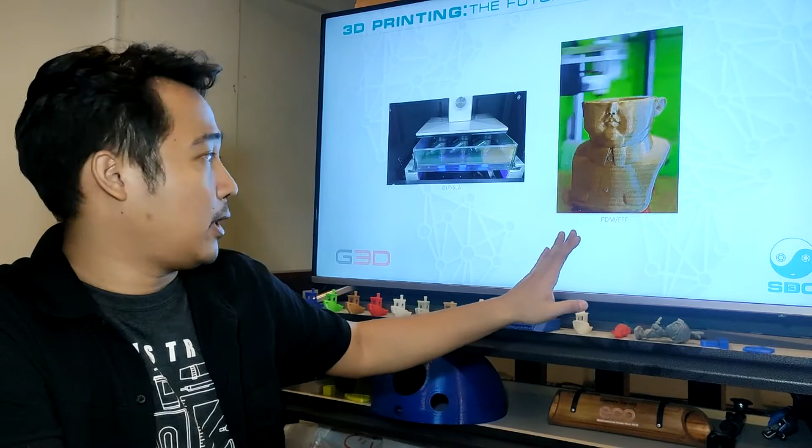There are two common 3D printers now in the market that are affordable and easy to use. The other one, on your right side, is the fused deposition modeling, or what they call fused filament fabrication, and the DLP, or digital light processing, and SLA using UV light to cure the plastic.

3D printing is a process in which material is joined or solidified under computer control to create a three-dimensional object using a CAD file, or computer-aided design, from a 3D model or a computer. So it is being used both as a rapid prototyping technology and additive manufacturing.

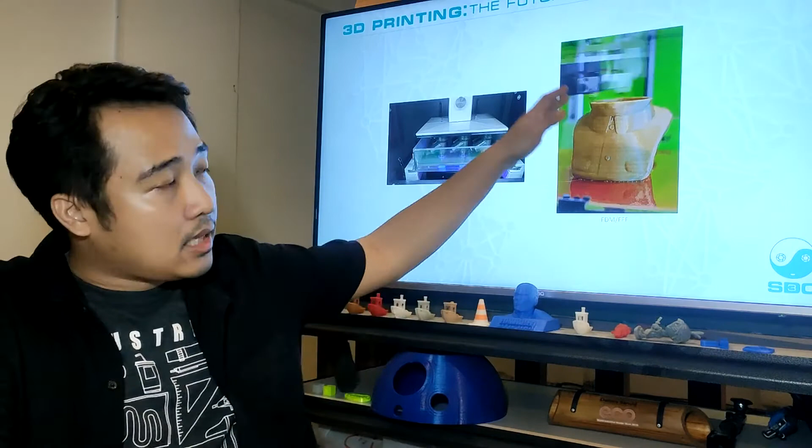Let's discuss the pros and cons of this technology. On FDM, this one can be printed at affordable cost and can be ready to use after printing. While on the DLP and SLA, it can print faster and more detailed than the FFF 3D printer.

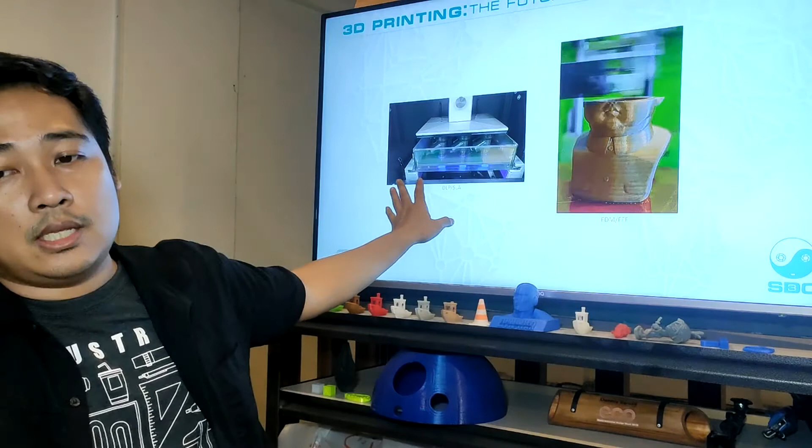So what are the disadvantages of using both technologies? On FDM, the printing is slower and the lines are visible. While on the DLP side, the con is it must be cleaned first before being cured, UV cured, or cured in sunlight.

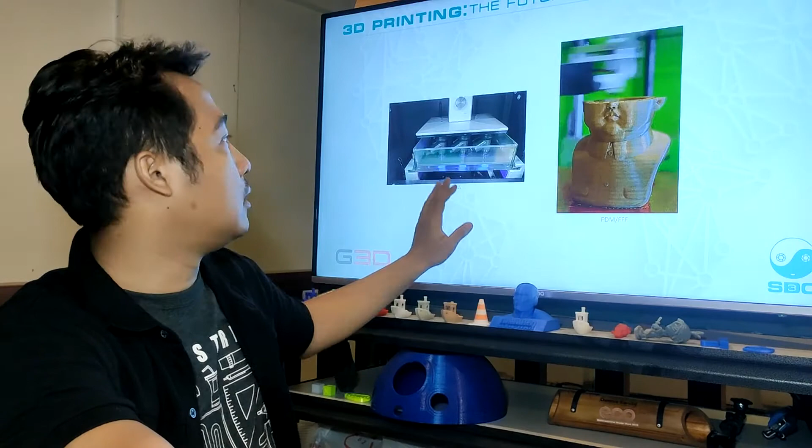As you can see here, this is the tilting mechanism of this 3D printer. I'll discuss this printer later.

3D printing made a big role in our battle against COVID-19. 3D printing technology was utilized to make things for critical healthcare and frontliners due to shortage of PPE, ventilators, respirator parts, adapters, and other material supply.

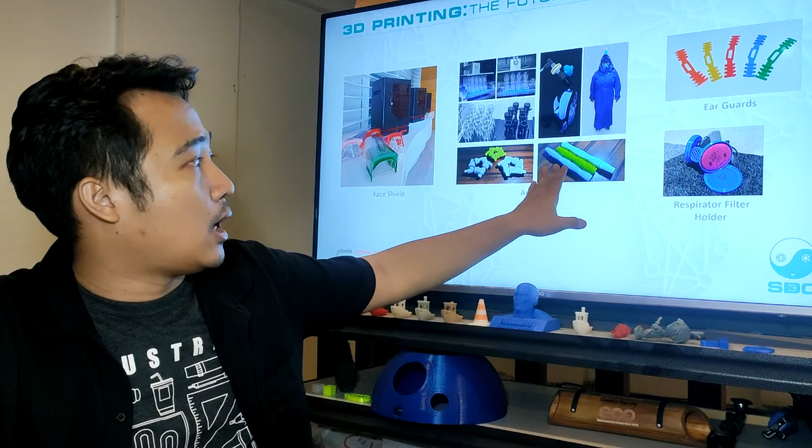As you can see in the picture, it was famous for making face shields and adapters. These adapters are Venturi valves. And then this one is what I've designed for our medical frontliners, for them to use as a modified respirator like this one.

On the other side are the ear guards, the famous ear guards, which you can put on your back, and then hold the mask or the N95 mask for you so that your ears will not get sore.

On this next slide, these printed objects are done with the help of Benilde ncoVolunteers and SDC 3D and G3D.

On this side, this is the adapter, or airflow adapter, for this mask or modified respirator mask, or what we call MORE mask. This one is our delivery in Rosario, Cavite. This picture is in G3D, or Global 3D Systems, which is made in the Philippines.

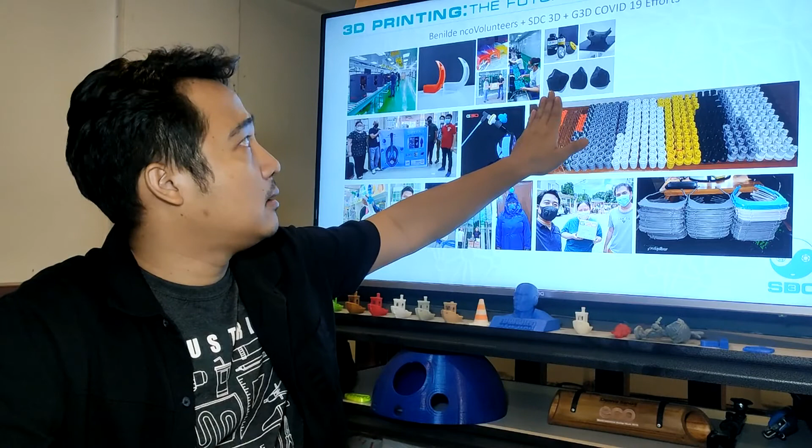On the other side of the picture is the laryngoscopy, which used medical grade resin. And this one is the respirator mask designed by G3D using their 3D printer, the T1000, and their resin.

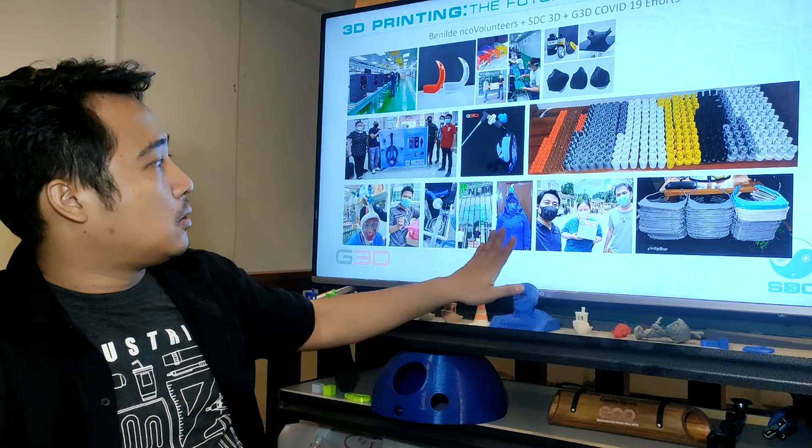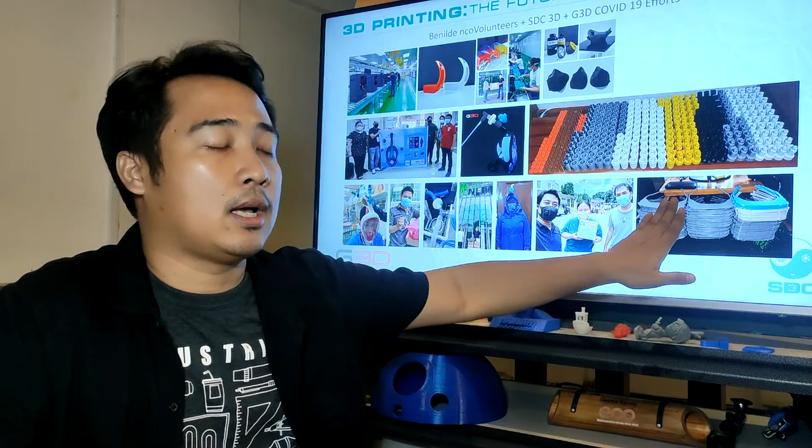And also I printed this face shield last April to help our frontliners.

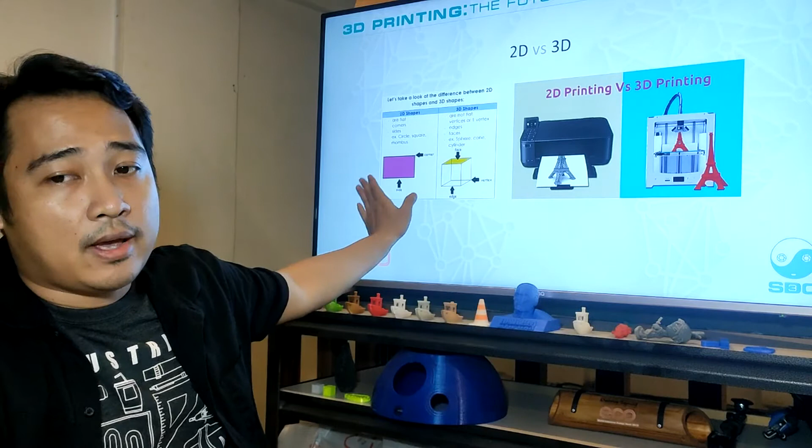For most of you who don't know the difference between 2D and 3D, this is it. The violet color is a flat shape or 2D shape, which has length and width, or flat corners with sides. These shapes are sometimes triangles, rectangles, or other shapes that are flat.

While in 3D shapes, there's another measurement, which is the height or Z axis. On the other side, the 2D shape only has X and Y axis.

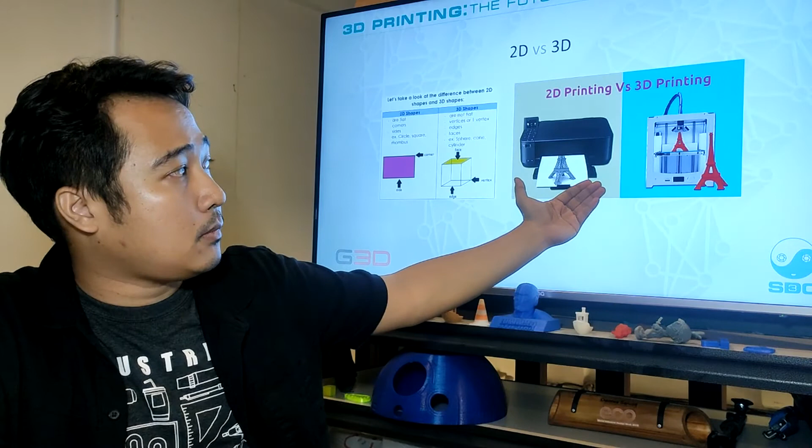In this picture, you will see an inkjet printer printing a 2D object, which is paper, and on the other side is a 3D printed Eiffel Tower using a 3D printer.

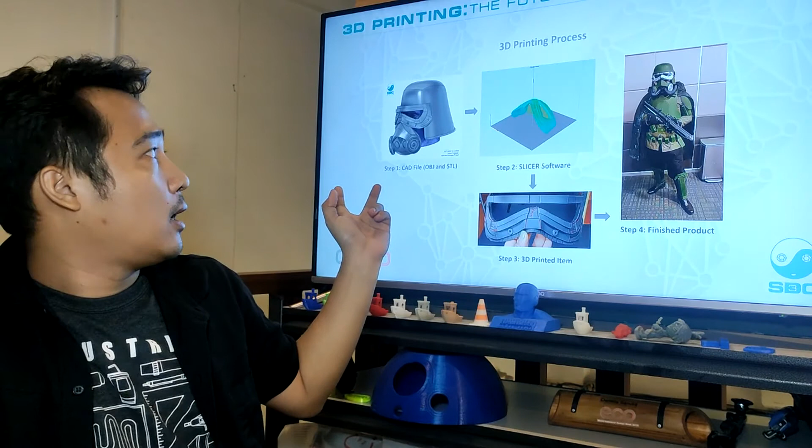On the next slide, you can see the process of 3D printing. First, you need to make a design so that you can 3D model it in your CAD software, which I will discuss later. This is a sample 3D model, which is then put into a slicer software. The slicer software reads the 3D model and converts it into G-code, which the printer can read, and then translates it into a 3D printed object.

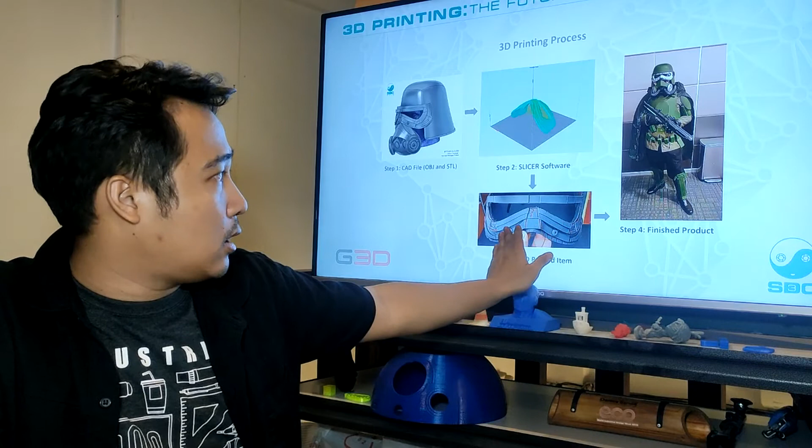After printing, you need to finish it, because there are lines that you will notice, and some hairy plastic on each side. So you need to clean it.

So the history of 3D printing. Most of you probably don't know the history of 3D printing, so I'll discuss it with you guys so that you'll understand when the technology started or was invented.

From 1981 to 1999 is the toddlerhood of additive manufacturing. In 1981, Hideo Kodama of Nagoya Municipal Industrial Research Institute published his account of a functional rapid prototyping system using photopolymers, like resin at the time. Three years later, in 1984, Charles Hull broke new ground by inventing stereolithography, which I showed you a while ago. Stereolithography lets designers create 3D models using digital data, which can then be used to create an object. That's the first decade of 3D printing, in the 1980s to 1990s.

Next is from 1999 to 2010, the 3D printing adolescence history. In 1999, scientists at Wake Forest Institute for Regenerative Medicine printed synthetic scaffolds of a human bladder and then coated them with the cells of a human patient. Later I'll discuss 3D bioprinting.